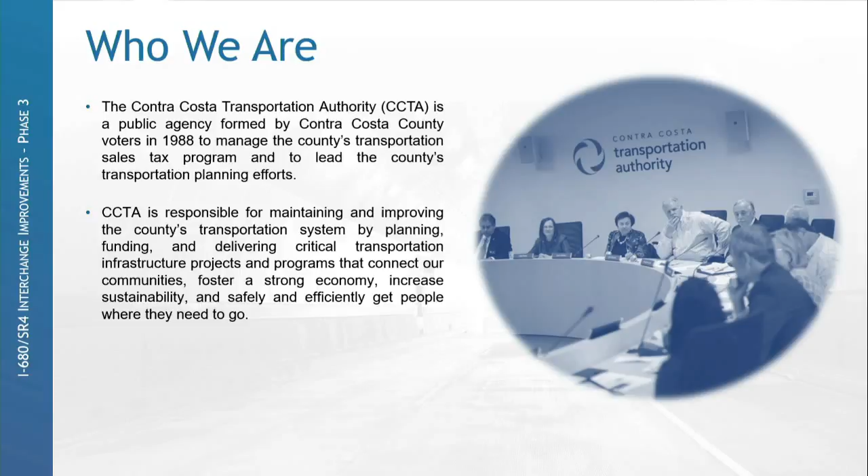This particular project benefited enormously from SB 1. That's the tax measure that passed recently, where there was additional sales tax on gas. So we are very happy that that particular funding was available for this project, and we were able to bring it out to construction because it's been on our books for a long, long time looking for funding.

So we have an 11-member board that governs us, and primarily you won't have to deal with them, but that's how we operate. What do we do?

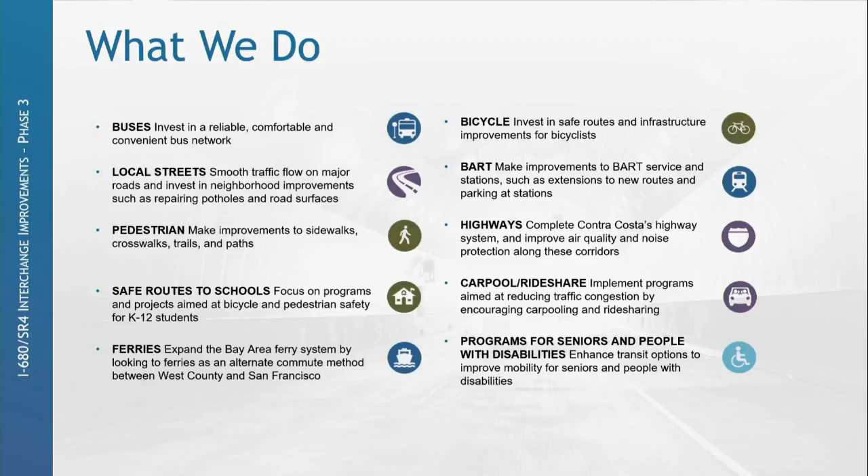We do all kinds of transportation programs. We also do carpool and rideshare. We also help fund other projects like BART, County Connection. We contribute to a lot of those programs. And of course, we do deliver highway transportation projects. We only build them, and then we turn them over to Caltrans, becomes part of the state highway system.

So a little bit about our roles and who actually runs the construction program. We have our executive director, Randy Iwasaki. Many of you might know him. He is the former director of Caltrans. He was hired about 10 years ago to run CCTA, and then he implemented the construction program here.

Joe Reyes has a great experience. He and I worked together at the Carquinez project. He was stationed in Japan for like 2 years delivering the steel segments. So he has a lot of experience working for Caltrans and Caltrans projects. And then the designer, Ben, he's not here right now, but he is with WMH. So that's the core team on our end.

So a few things to know about our projects and how we operate. You know, obviously you have to comply with prevailing wages, and you will be registered with the Department of Industrial Relations in order to submit a bid, both primes and subs.

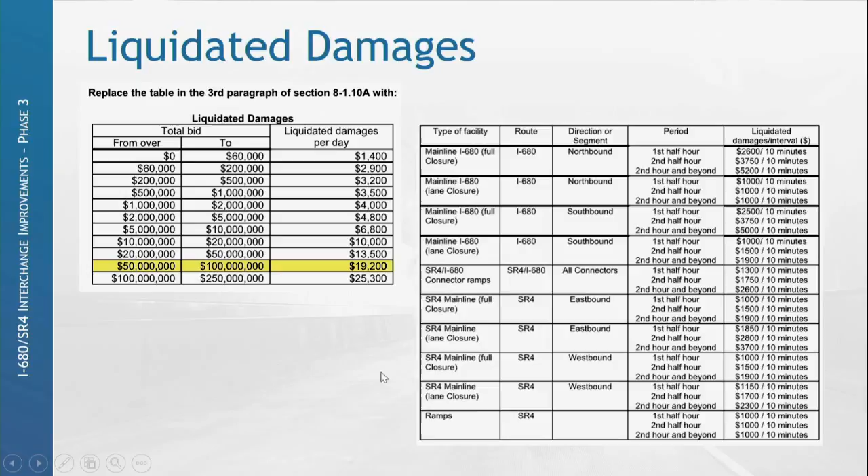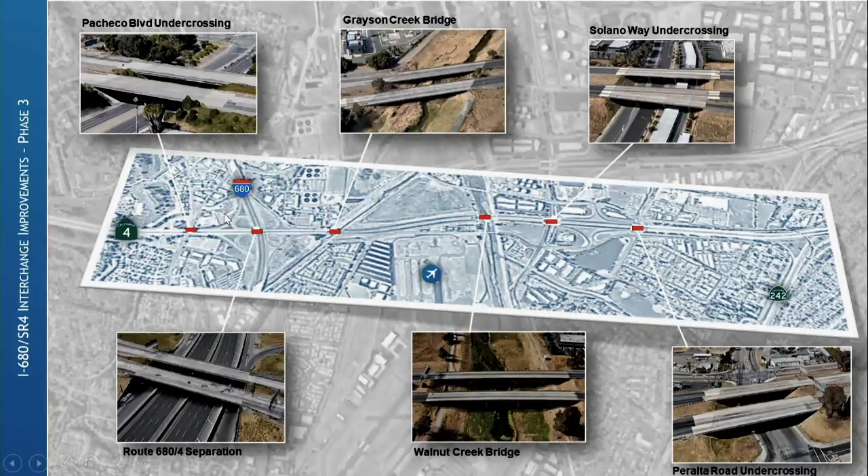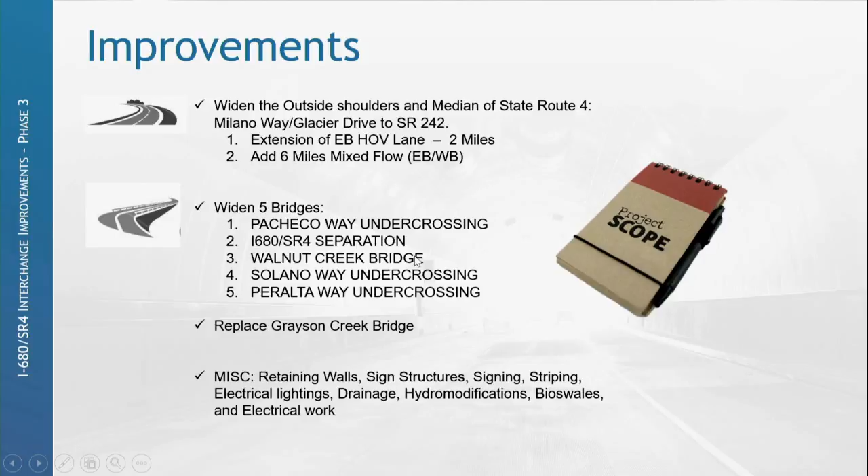The improvements we're going to be doing start at Milano Way/Glacier Drive all the way down to 242, which is essentially an HOV widening and adds about 6 miles of mixed flow eastbound and westbound. I talked about the bridges that are going to be widened or replaced at Grayson Creek. And of course, there's a lot of miscellaneous retaining walls, sign structures and such that you'd expect on a big project along this highway.

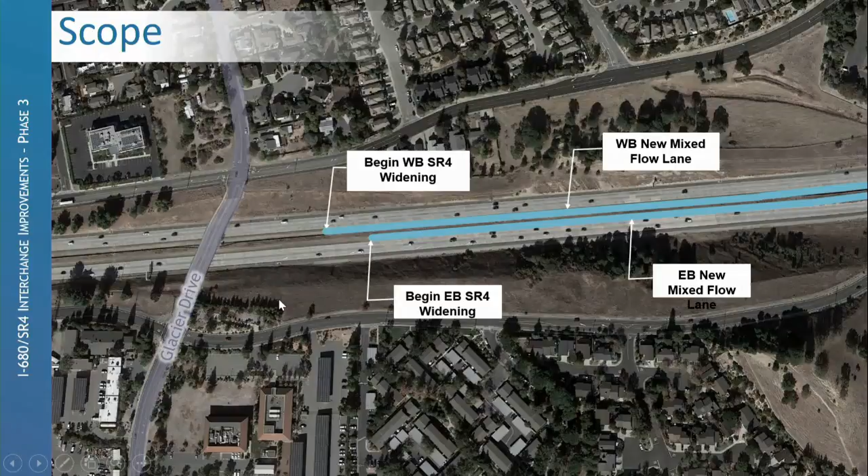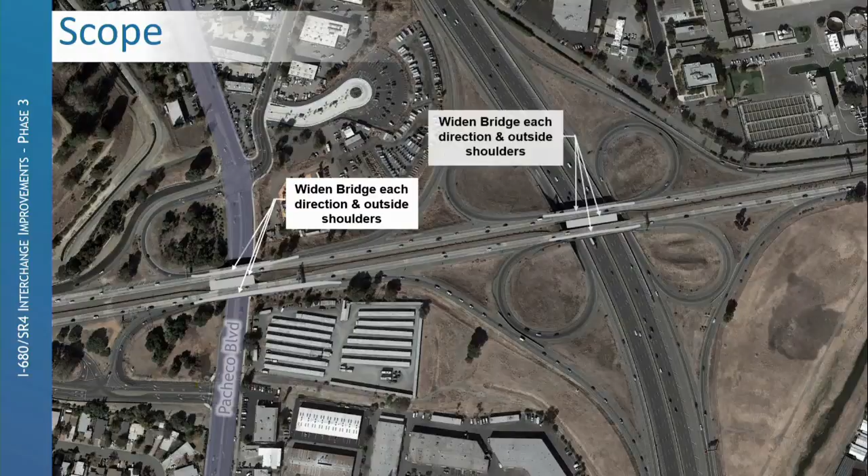So here's an overview of where we're starting. The county offices are right around this exit here, Glacier Drive off Highway 4. There's the median widening and the mixed flow lanes on the westbound and eastbound. As we move further to the interchange, we're obviously going to widen the Pacheco Boulevard Bridge as well as make improvements on the interchange.

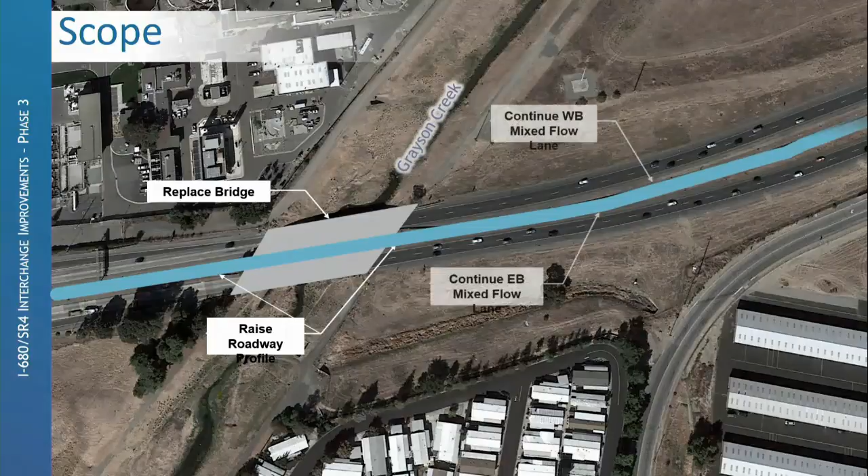Moving further, we get to Grayson Creek. This is the one that's going to get fully replaced in 2 stages. We have to deal with Grayson Creek work windows as always.

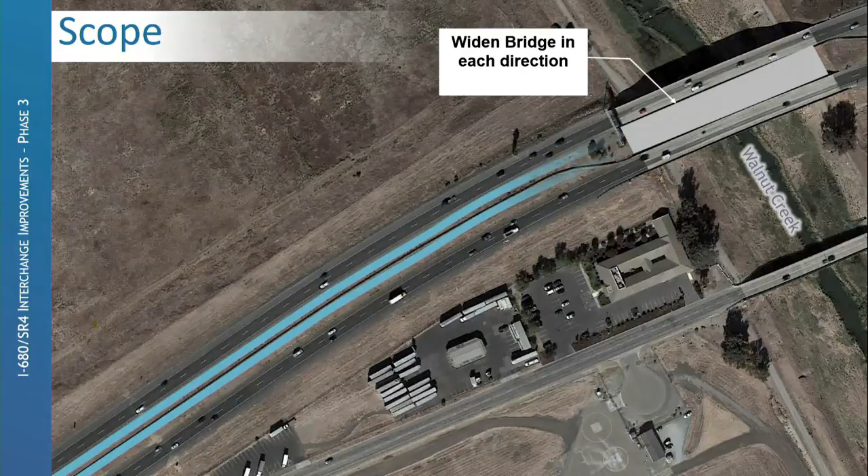And likewise, we also have Walnut Creek. This one, I believe, is going to be only a median widening, so it can probably be done in one stage.

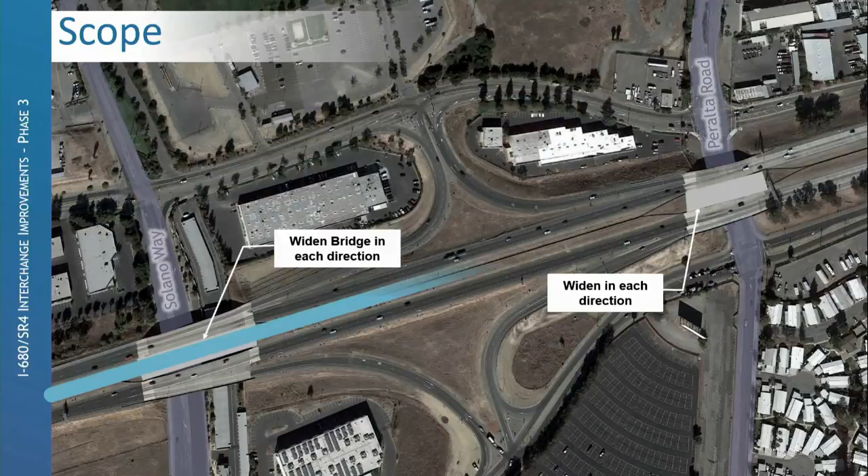As we move further west towards the end of the project, we have Solano Way, Undercrossing, and Peralta, all of which have roads underneath them. But specifically, Solano Way is one that we need to pay attention to because there is an extra space storage underneath the structure that needs to be coordinated, and access with regards to working with that owner is very, very limited.

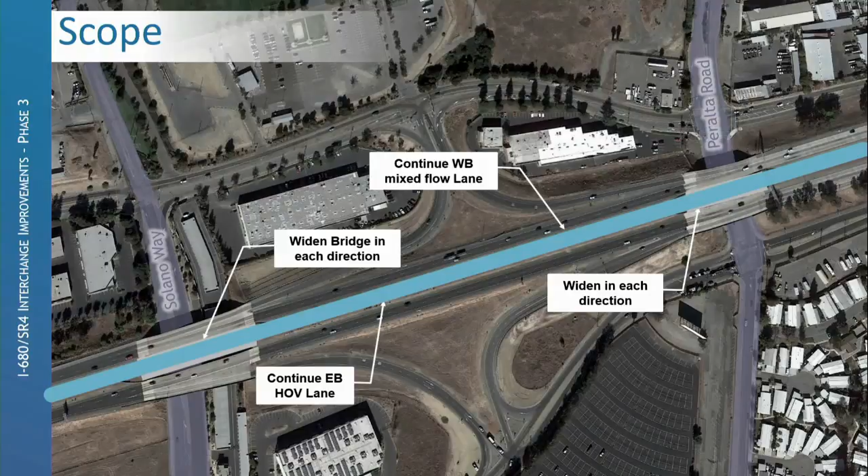So that's all stipulated in the special provisions. Please pay attention to that to make sure that you attack it accurately.

And then lastly, the project ends towards near 242, and eventually, when it's all said and done, this is a primary HOV lane that's going to get used and connect the east and west side of Highway 4.

So this project has been a long time coming, and it took a long time to get here, and there's pressure for us to get it started. I know there's already discussions of whether this job is going to get postponed or delayed, or moved out on bid opening. At this point, we have to stick to our schedules.

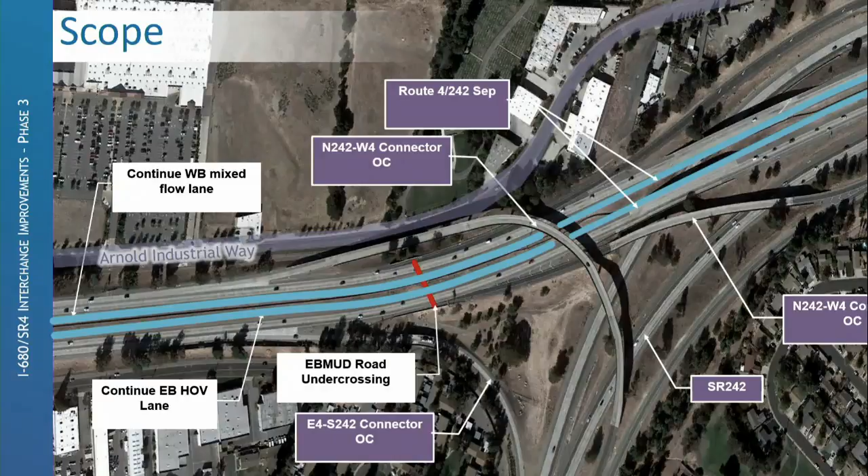So that's the answer that we're hearing from CCTA. So that's the way we're going to proceed forward as of right now. A little bit more, same thing, just ending it. A little bit more of the closer look.

This job has both cut and fill, so I don't see any import on this job, so it's mainly roadway X and balancing. Some of our typical cuts, obviously as shown right there, starting at the beginning of the job. I don't know if you can see some of the quantities I wanted to highlight there, just to give you a magnitude and perspective of how much AC we're putting down.

We got about 29,000 tons there of type A asphalt, and then another 8,000 tons. So not super great quantities, but enough to make sure that we pay attention to those.

Of course, we have our JPC pavement that we got to deal with, and there's a lot of slab replacements out there to be determined. We've attempted to show all those on the plans, but we know those are going to grow potentially, so keep an eye on that.

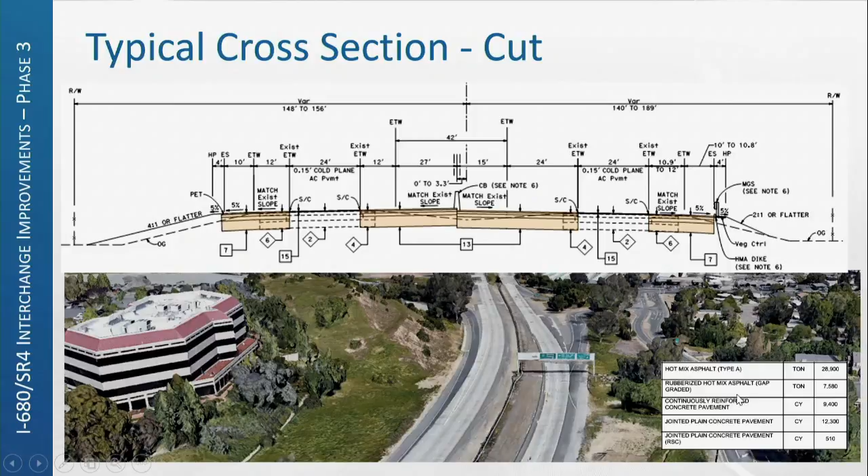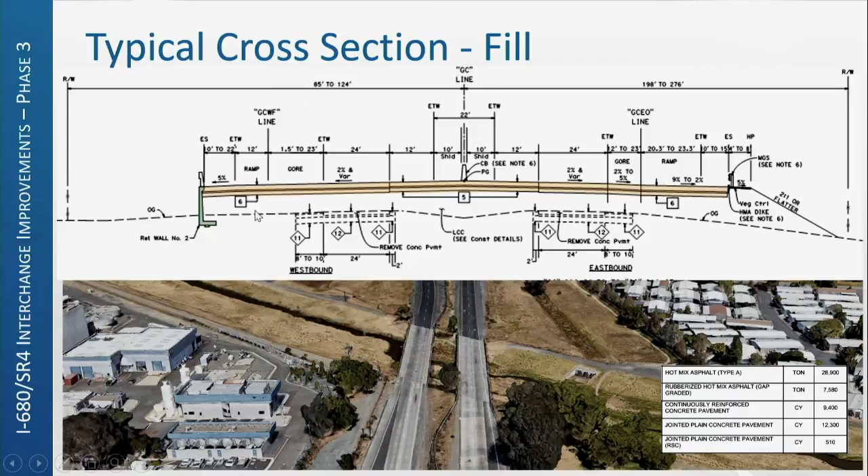And then in some sections, the difference is the other one was not a full median fill. This one is. And of course, when we get to the fill section, there's the existing, and we're actually raising this. This is more towards the Grayson Creek area, where we're actually raising up the structures and approach ramps or approach structures to meet the flood criteria. And within those, there's going to be some retaining walls and such to make sure.

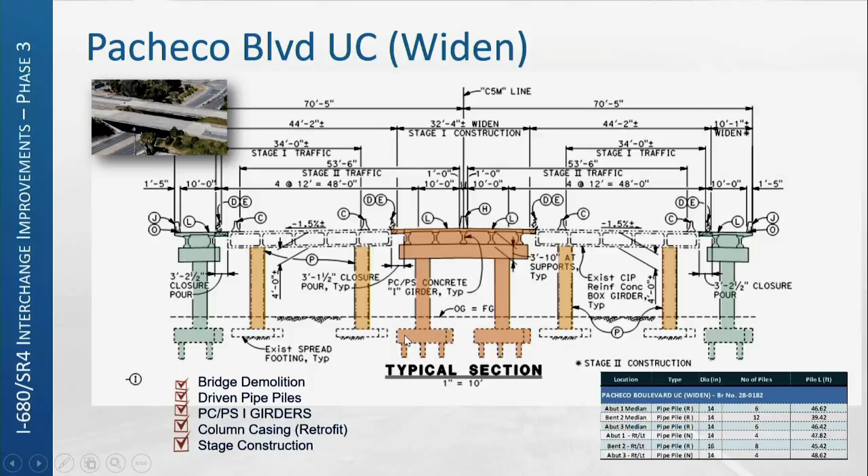Pile driving, I want to highlight, I was talking to Dave earlier, is a key here that we're not allowing any pile driving at night. So it's important to look at every one of these locations as we had during the design phase to make sure that you look at it, because in some areas you may be able to get a regular rig out there, but in some areas you may have to get a special equipment rig to get underneath the bridges.

And then moving these pile rigs at night is probably our solution, because we can't close the local streets in the daytime, let alone some of the freeway closures are going to be very limited.

680 and 4, same thing. We also have driven piles over here, precast girders, two-stage construction, so very similar with column casing retrofit. This is probably the busiest of all the bridges, just because 4 and 680 all meet there.

So depending on how you attack the work, it's just paying attention to the lane closure requirements and what lanes you can do your work in the daytime versus the nighttime.

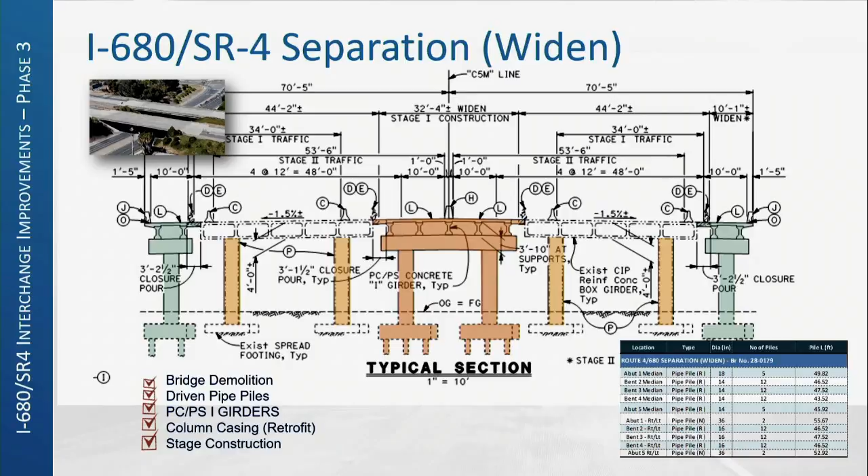Grayson Creek, this one, if we go out to construction this year, we obviously missed the window, so this is going to have to go to the next work window, which is next year. And because it's two-stage, it's probably going to take 2 seasons to get it out. So we're talking about 2-season construction here as well.

Very similar to the other ones: precast girders, stage 1, and then column retrofits, and obviously stage 2, where we widen and put it all together.

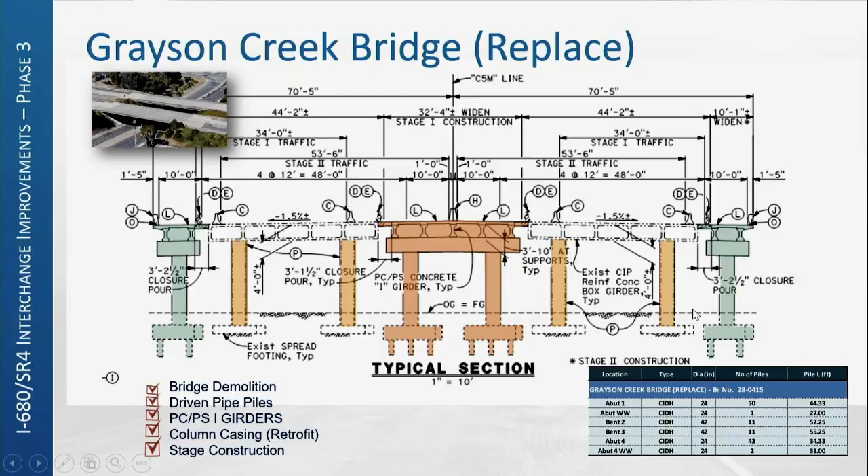Surveys on the contractor, just a note on this. One of the things when we do two-stage construction is we always want to make sure what we built on stage one will still match what we are anticipating on stage two. So all that is spelled out also in the contract. And as we get to Walnut Creek, we can probably attack this next season and get it done in one season if we plan our work aggressively enough.

The only difference now is this one is cast in place box girder, so now we have to deal with false work. And if someone asked me earlier, some of the precast girders are allowed to have metal decking, but some are not. That's more of a Caltrans requirement instead of a CCTA requirement in terms of visual. Only Grayson Creek, I believe, is allowed to have a precast girder with metal decking. The rest that are precast, they want them stripped, formed the old-fashioned way.

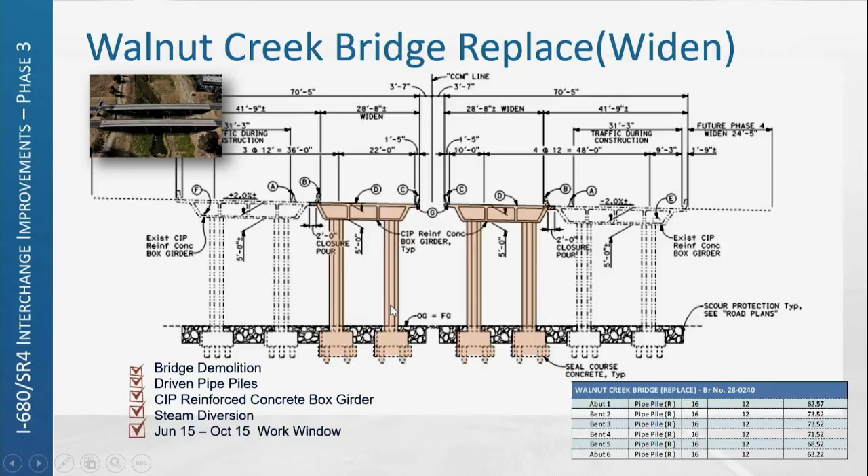These are all driven pipe piles, and we're going to be limited to our June 15th to October 15th work window here as well. Moving on to the local streets, Solano Way, please pay particular attention because we have both driven piles as well as CIDH piles. If you look, there are some big monster piles out there in terms of CIDH. Kinder Morgan utilities are out there, so there are some specific requirements that they have.

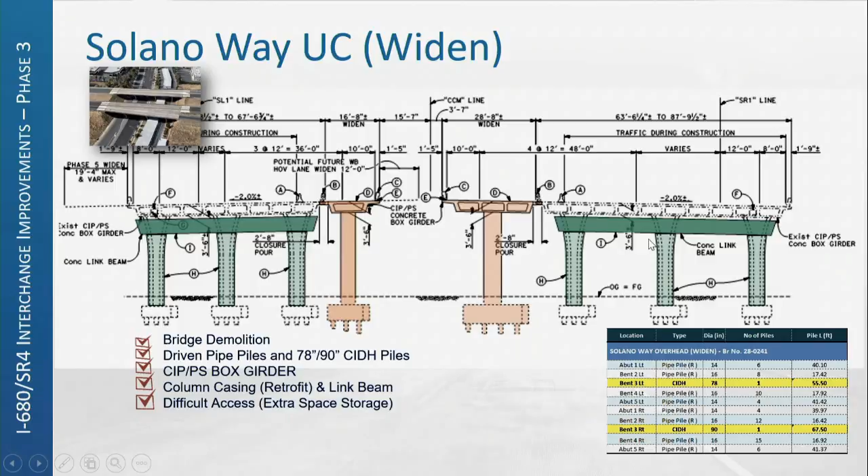More importantly, at Solano Way, the existing business out there, Extra Space Storage, is very concerned about how we're going to build this bridge over them because they have a storage facility directly underneath our bridge, and they are not being accommodating in terms of the number of nights we're allowed there and access. So we put the information in the specs as best we can. Please pay attention to that, but we basically have a cast-in-place pre-stressed box girder there that we're building. At the same time, we're also retrofitting the columns and adding a link beam there. So there's a lot of work to be done on that, and it's on a local street. I want to emphasize the difficult access there.

Lastly, Peralta Road. This one is a simply supported structure, no columns. So the only limitation we have here is being able to work around on the local street in terms of moving our equipment. But if we can do most of it on the top, on the side, then the only issue we would be dealing with in terms of local traffic is getting our false work in there.

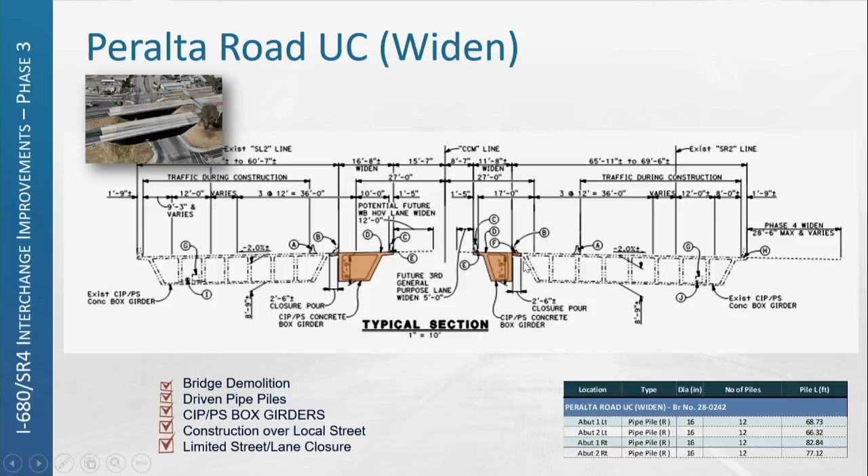Some of the specific features, if you focus on Grayson Creek, which is where this is, because we are elevating the structure there, we are going to have to do it in stage construction. So we have anticipated these temporary retaining walls. We didn't define which one you can use, because you can obviously have multiple designs that are going to be evaluated, but at the end of the day, it's your design. It's up to you what you want to use.

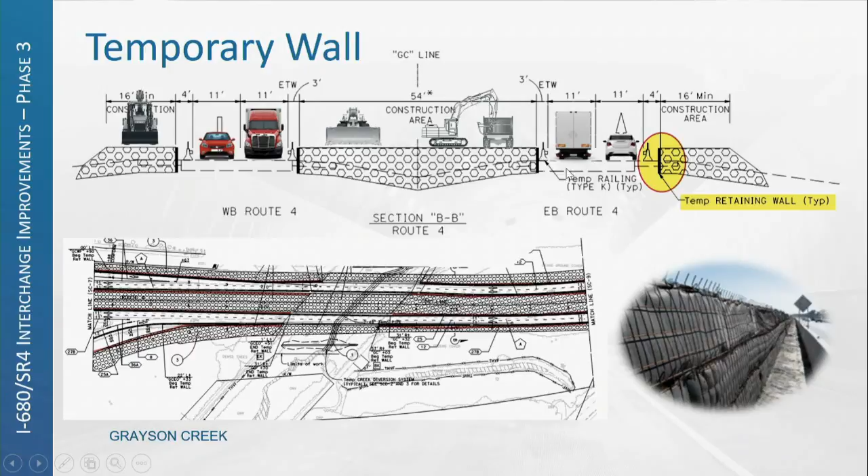In this particular area, there's a lot of things going on. We have aerially deposited lead, as well as the fill has to be lightweight embankment. So all that needs to be considered in how we're going to design this temporary wall, and more importantly, execute it and get this thing in place while we're dealing with traffic. So, temporary wall, I want to highlight that and make sure you're aware of it.

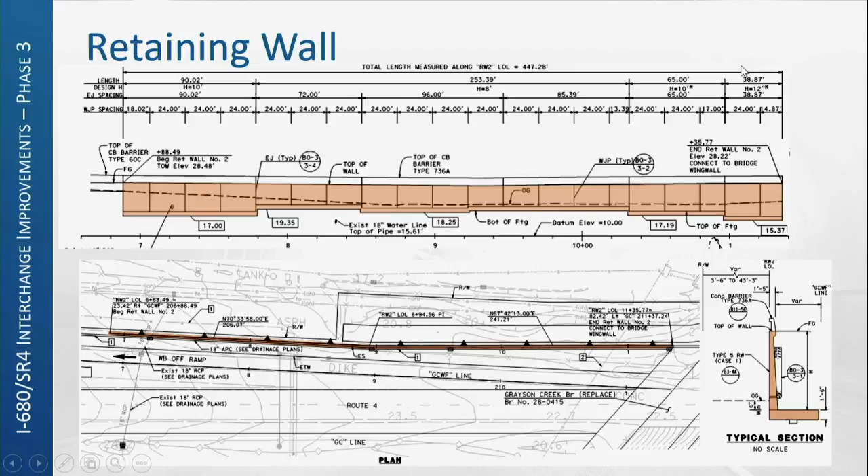And of course, we have a few retaining walls. I just wanted to show this is probably one of the longest retaining walls along I-680 and 4. It's only 450 feet long. I keep looking over there, I have it here too. Anyway, that's the one we probably just want to highlight. There are 2 walls out here, and this is the longest one.

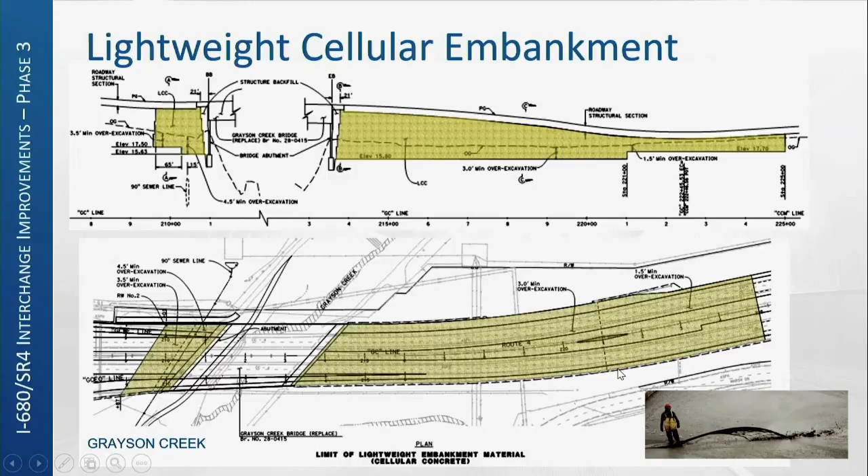So here's the lightweight cellular embankment. Again, if you saw my other picture, I had stage construction shown on there with the temporary retaining walls. This has to be incorporated with that same drawing that we anticipate, and then stage it out somehow. And lightweight cellular embankment, it's like pouring water out there almost, so you have to kind of pour it in certain lifts and factor your design on your retaining wall as well, and encapsulate it.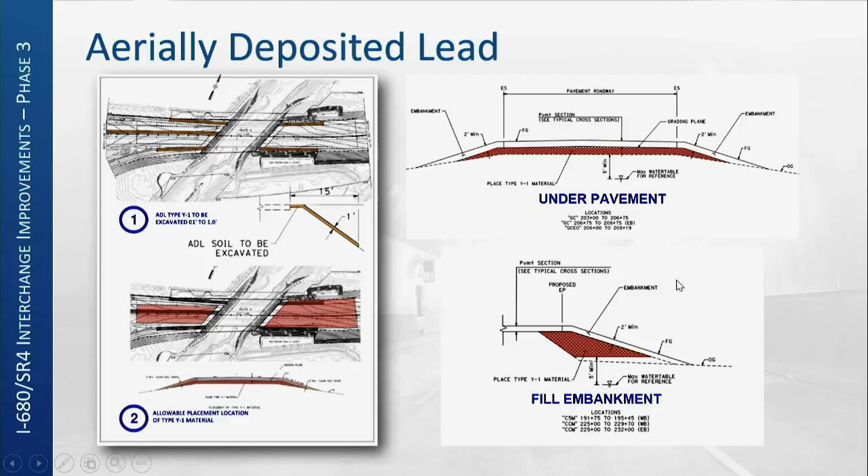And lastly, in the same area, we have aerially deposited lead, and we are allowed to encapsulate that in the existing roadway. So if we can combine our stage construction along with our lightweight embankment fill, it's all in one area. I wanted to make sure everyone was aware of that, because I think that's where a lot of the one-on-top-of-each-other discussion is going to happen between the subs or the primes.

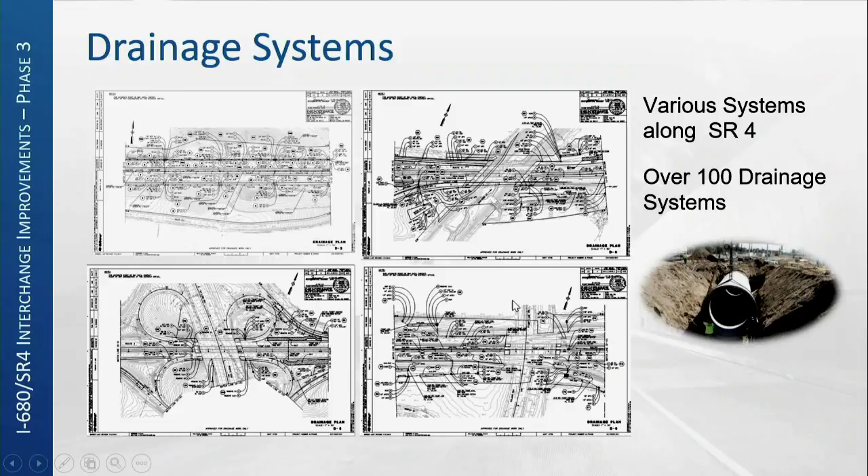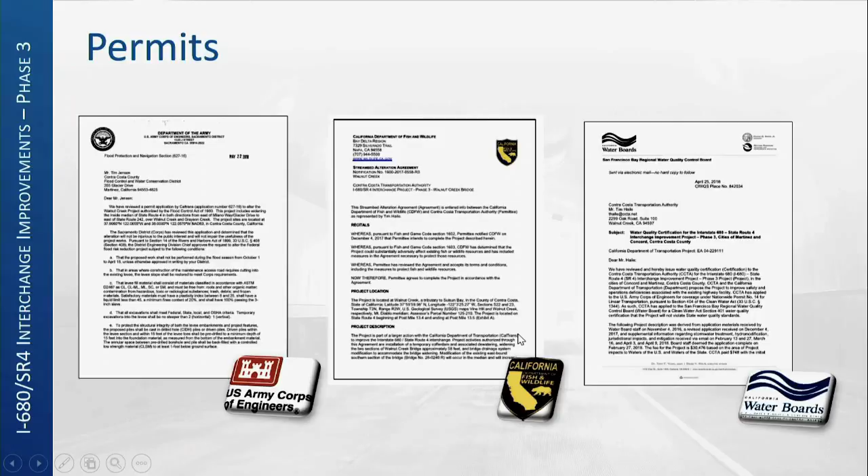Because we are working with Grayson Creek and Walnut Creek, there's specific permit requirements, as you would know, every time we work around water. I wanted to highlight a few of these that are out here and be familiar with them. They are part of your package for informational purposes. I think there's like 800 informational sheets out there. Those are available for you to peruse through, because it leads to getting the work done on the 2 creeks that we have, Walnut and Grayson Creek.

Again, we have June 15th through October 15th. We obviously missed our first window this year, but we got season 1 and 2 next year, and those have to happen. I think the critical path will probably go through Grayson Creek, just because it's 2-stage and it has the most work, almost building 2 bridges, with only 2 seasons to get it done.

We will have a biologist on board to monitor pre-construction, ongoing construction, and after construction to make sure we're in compliance with the permits. Just so you guys know that.

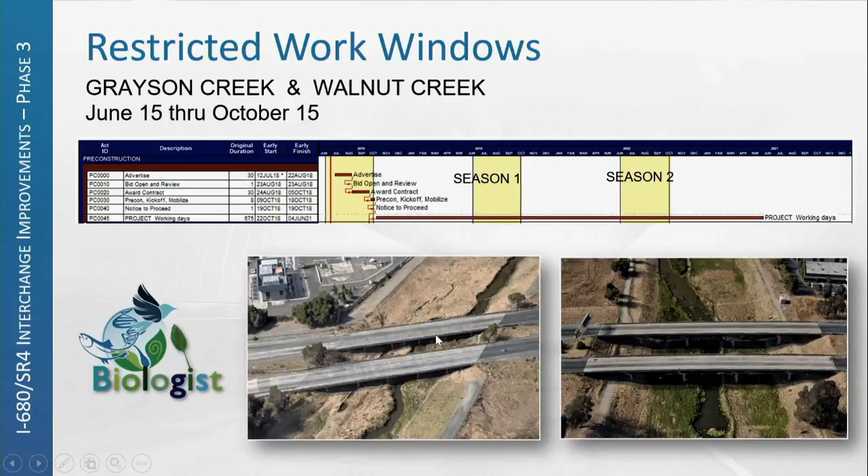Within that temporary creek, in our plans, we've anticipated that you'll probably need these diversion dams or temporary creek diversion. The only caveat is they cannot stay in place past October 15th. So if you have work that needs to be done past October 15th that requires you to be out there, they must be pulled out. So, as an example, with Grayson Creek, you're going to have to put that creek diversion dam in twice, if you're going to come back the following year.

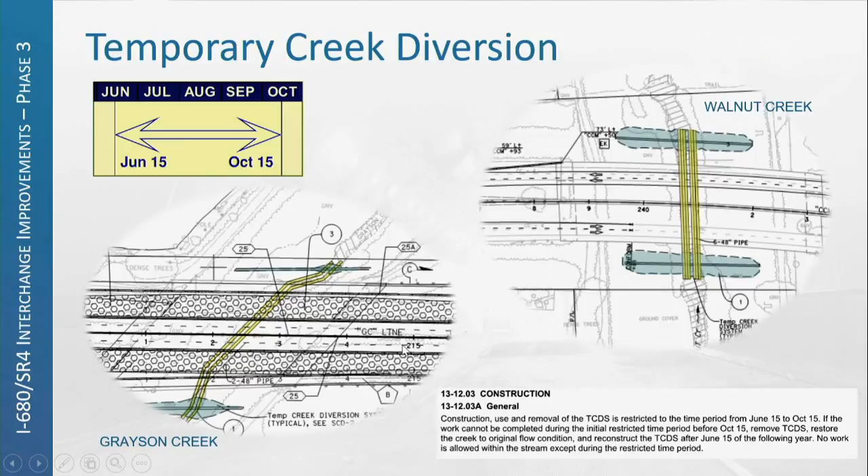Bridge removal - one thing I want to highlight, we're going to allow bridge removal only between 9 p.m. and 5 a.m., Monday through Saturday, as it currently shows on the specs right now. These are the bridges to be removed. It's almost like an exception to the noise restriction requirements, because that's a sensitive topic to CCTA. Pile driving used to be allowed here, but it was removed due to issues we faced with other projects.

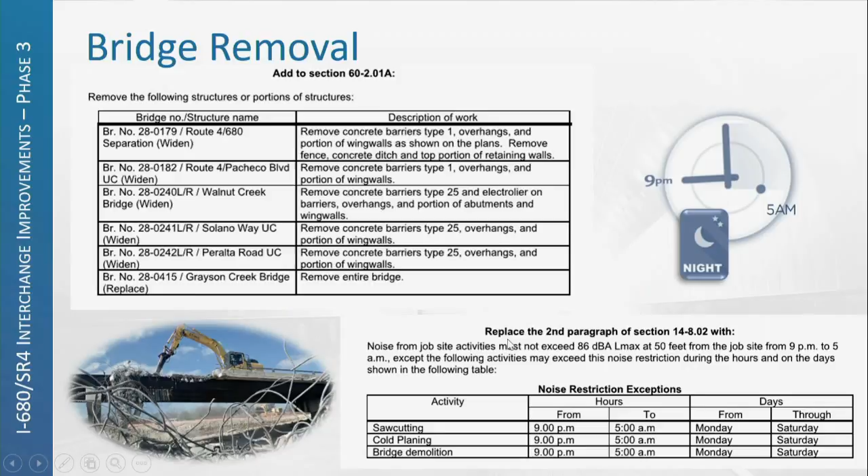So bridge demolition is going to fall in the night, between 9 p.m. and 5 a.m., although we're only removing a sliver of it on the roadway widening area. But Grayson Creek is a full bridge demolition, so that's where most of the noise is going to come from. If we can stay within the 9 to 5 window, I think we should be okay on those. We're ready for the complaints to come in, but that's the best we can do for bridge demolition, because we can't do it in the daytime.

Driven piles - I've highlighted the 680 separation here because this one appears to be the most congested, between driving piles in the median and the exit ramps over here. There are 1, 2, 3 locations where you may have to use these low overhead drill rig equipment. In my little animation drawing, I've shown in gray where the bridges are on top, and then the footings below, where the median ones are going to be getting close to the bridge, depending on how much we remove from it.

So we've addressed those in the contract, and hopefully it's clear that this one is not your normal rig. More importantly, when you set up your equipment, there's a lot of ground anchors that hold this temporary retaining wall for the abutments. So we're going to have to face those when we put our piles on the abutments. There are ground anchors that need to be verified so we miss them before we do any pile driving.

So again, special equipment, and because of the height limitations, and these are driven pipe piles, you might have to do some field splicing in the field on the job site.

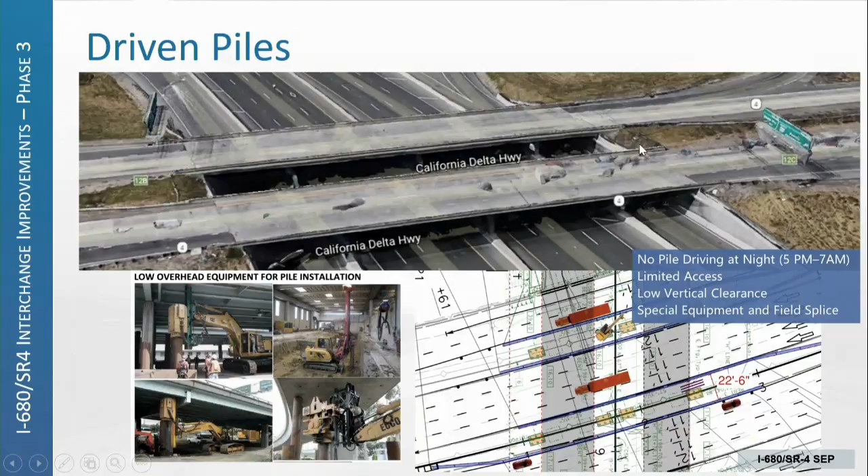In terms of movement, I want to highlight that too. You may not be able to move this crane or rig you have out there in the daytime, so it's stuck there doing pile driving in the daytime, but then we have closures allowed in the nighttime where you can have delivery of materials and movement of your equipment. So that's how we anticipated the contract. You do driving in the daytime, and then you move equipment and bring in material at nighttime.

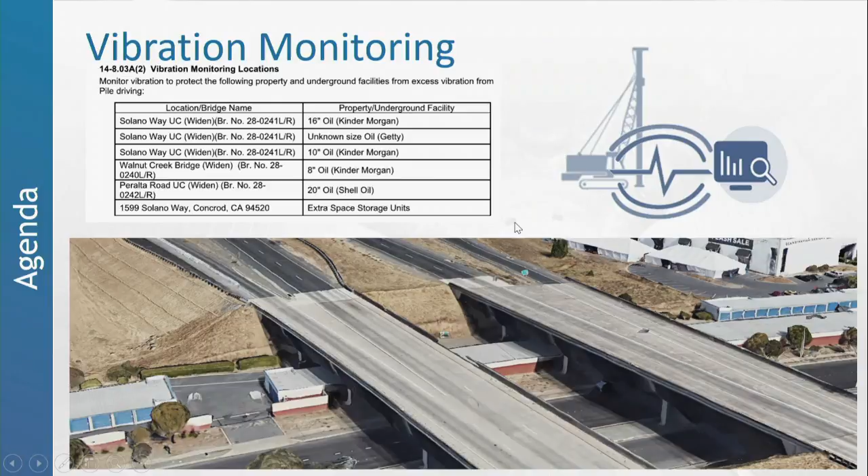Because of the sensitivity of a lot of the structures, more importantly extra space storage, we have required vibration monitoring. If you look at this photo, there's extra space storage directly underneath where we're going to be building a bridge on the inside and on the outside. So there's extra space storage, not only for vibration monitoring, but then we also have Kinder Morgan and Shell oil lines, Phillips 66, that need to be monitored to make sure we don't damage anything. That's kind of where we stand with those. Outside of them being on the job site watching us do the work, we have to do some vibration monitoring to show them that we're not doing any severe issues, damage, or any concerns for their facilities.

Lane closures. I think there's 28 total lane closure charts on this, so if you're trying to do one work in one location, you may have to use 4 or 5 lane charts just to get your closure through Caltrans. So I've highlighted all of them. That includes lane closures, freeway closures, street closures, local street lane closures. So we just need to look at those closely to make sure that we're implementing the correct one.

Someone had asked, can we put false work out there on Solano using the lane closure chart M1 or M4? The answer is yes, only for pile driving. So pay attention to some of those lane closure charts and make sure you're using them correctly. There's just a lot of them.

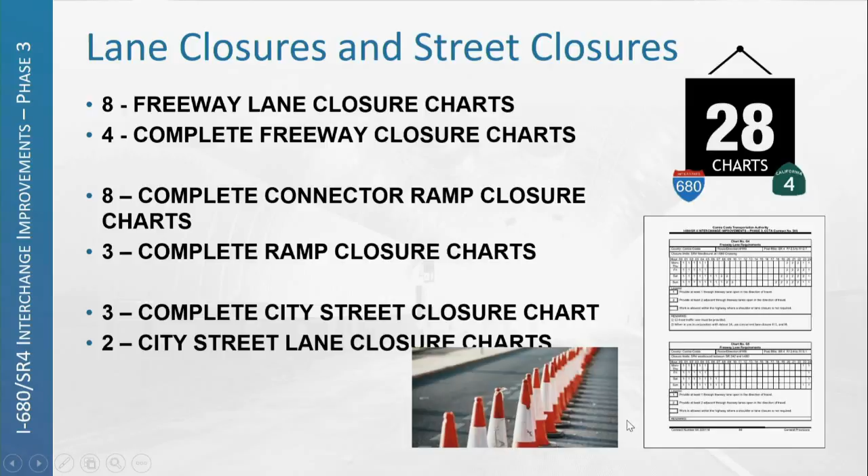And with that, Caltrans and COZEEP will be very involved, and then we've defined a complete freeway closure is allowed, but it can only be for certain things. So you can't just close the freeway just because you want to close the freeway. It's only for specific items. So that's also outlined in the contract.

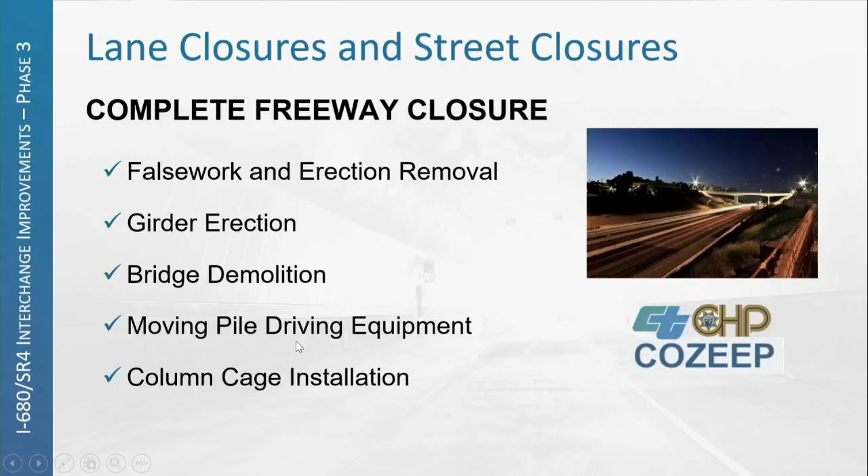As far as detours, we're going to have many of them because we're going to be erecting false work on the freeway or false work on local streets. So we do have freeway detours specified. Just take a look at those to make sure that when we plan our work out, they are being implemented in a manner that will provide public safety, the traffic detours are correct, and they're not creating confusion to the work that we're performing, let alone the detours that we're providing.

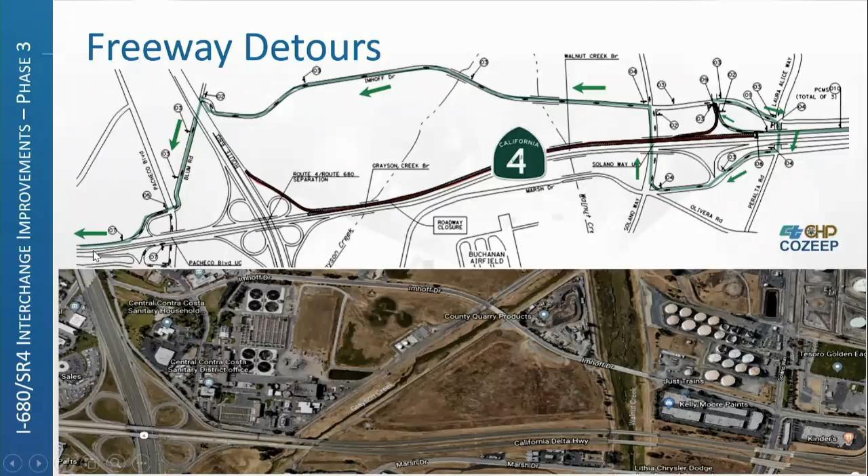If I go backwards on this one, I forgot to mention, on the freeway, we're closing a stretch of the freeway from 680 all the way out to Solano Way. So again, we're taking people off the freeway and making them go through this green route to get back on the freeway. And Caltrans was acceptable to that, so we're just going to have to make that work. So for whatever work we need to do on this stretch, at least for right now, that is allowed.

And last but not least, the famous coordination. There's so many people involved in this project, not only from a construction perspective, but also in-house perspective. So when you put them all together, outside of building the job, everyone has to be happy in one shape or form. So I just wanted to highlight that this job is no different, because at the end of the day, we got to get the job done.

So CCTA has been very proactive in getting a lot of utility work relocated outside of what we're trying to do. Currently right now, we have a contractor out there working for Kinder Morgan and Phillips 66, where this existing oil line that's owned by Phillips 66 and Kinder Morgan that goes right through the Grayson Creek Bridge is being relocated now and going down here in this new location.

So we're out there watching it, as-builting it, to make sure nothing is abandoned or left in place on our new footings. Make sure you rip it out of the way. That way when you guys go out there, to the best that we can, we've done our best to make sure we don't get delayed when we get going.

So that project is slated to complete around September - which one is this one? This one, October. So hopefully by the time we start, they're out of the way.

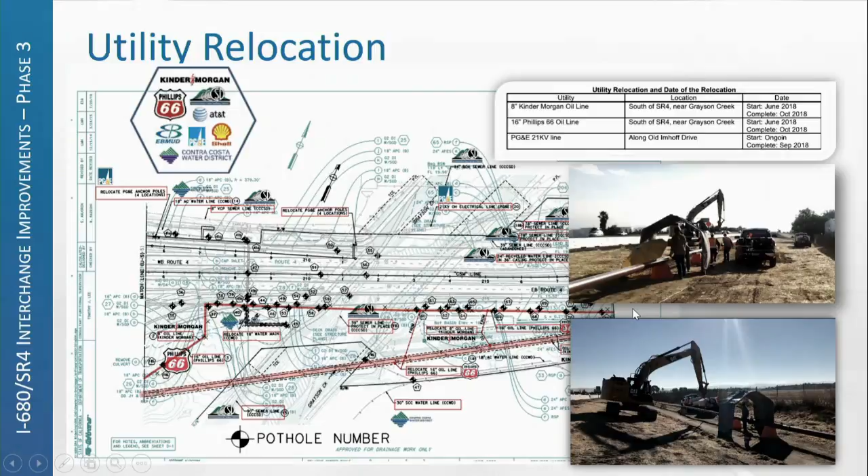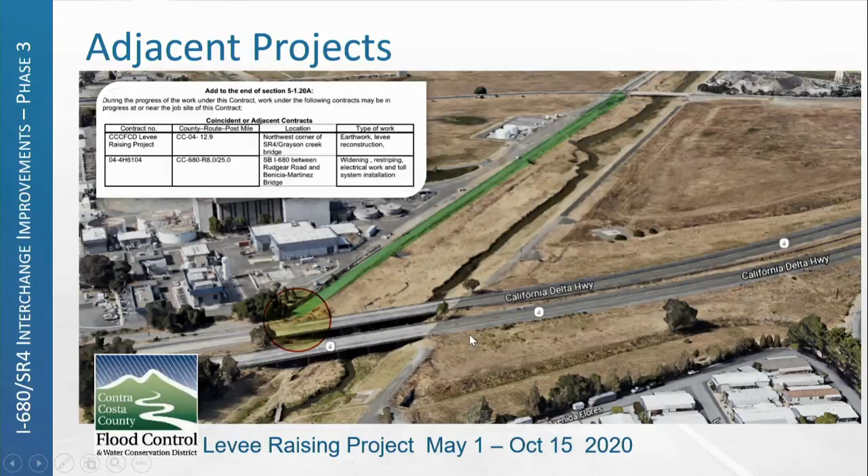Okay, and also adjacent projects - this is going to affect Grayson Creek coordination. There's a levee raising project highlighted here in green coming up, but it's not till 2020 from what I understand. So by then we should be complete with Grayson Creek Stage 1, but we still will be there for Stage 2. So all they want to make sure is they're able to complete their work over here. We're going to have to do some coordination, whether we start here while they're there and vice versa. So until we get there, that's something we just have to keep in mind.

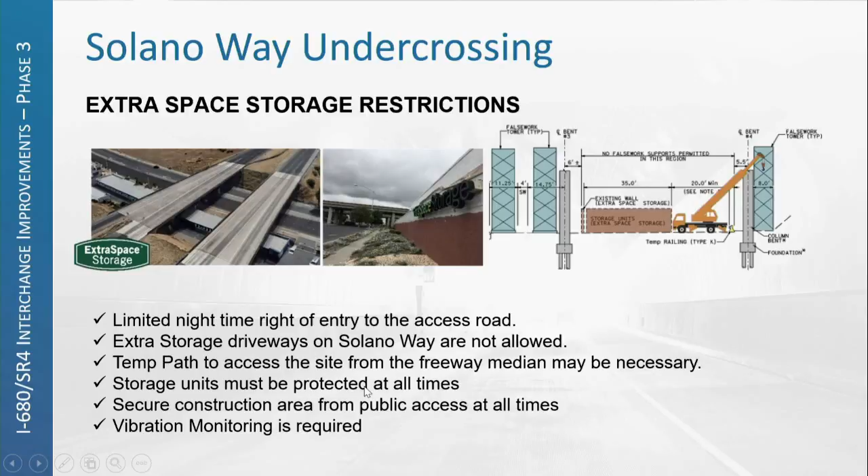The storage units must be protected at all times because they are still being used, and then we secure the area from what we're doing versus what they're doing when we go out and leave the project at nighttime. And of course they want us to implement some vibration monitoring, and all that has to happen while we're trying to build this whole bridge over the top of them.

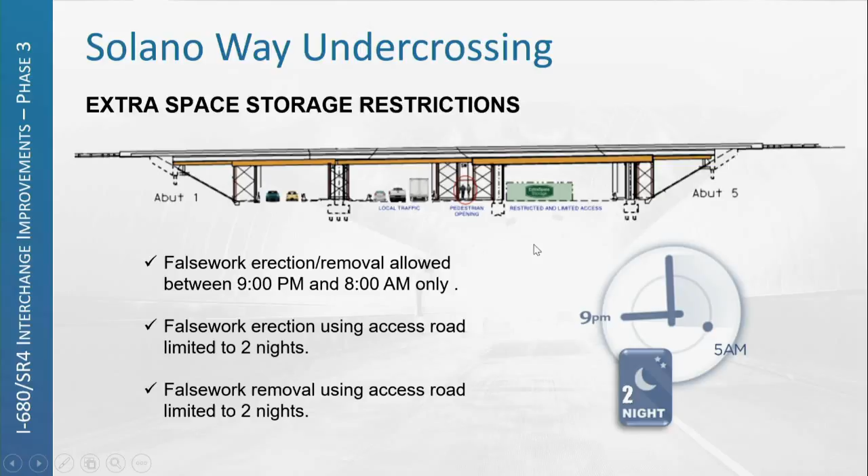So again, false work - I'm talking about this area right here because that's where the building is. To erect all this false work, remove false work, and everything else, they're limiting us. Hey, you can only be here between 9 and 8, you can only do it in a couple nights. So it really has to be pre-planned out, because if you can't do it in 2 nights, they're not going to allow us a 3rd night at this point. So that's what I want to highlight there.

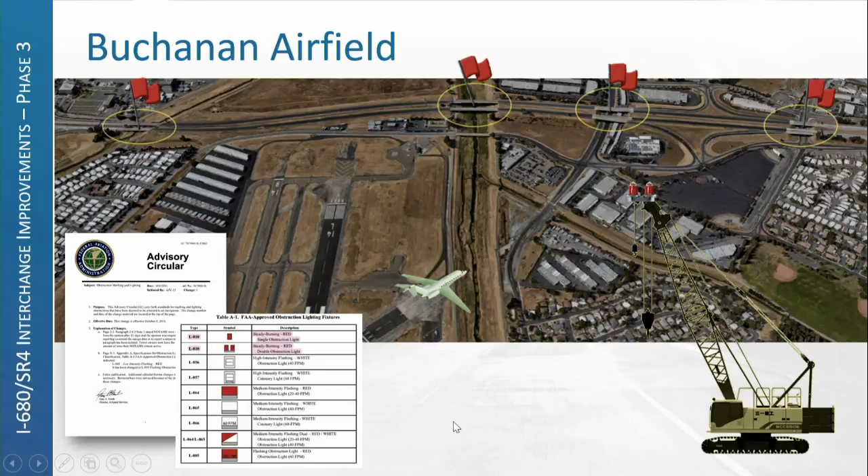And Buchanan Field - sometimes this is easily missed, although there's a big airport out there. So the 4 structures near the airport, crane is what they're concerned about, depending on what crane you're using. There's an advisory circular from FAA that requires height restrictions and light requirements. They're referenced in our contract - if you can see all our runways going this way and landing maybe going this way, maybe that's not an issue, but these 3 particular ones, depending on what equipment you're using, we have to comply with those and coordinate with them to make sure we're not putting a 200-foot crane out there in the middle of their landing season, whatever that airport references to.

So that is the big picture that I have, guys. Again, this project is on Bid Express, so please check the bidder inquiries regularly, because we try to answer as fast as we can and then issue addendums as quickly as we can. Right now there's probably only 8 to 10 questions in there. The last day to submit is, as I said at the beginning, August 16th. So after that we can't accept any more inquiries. And of course our bid opening is on August 23rd.

It is all slated to start this project on October 19th, and it is a big deal for CCTA to make sure it happens. So with that, I'm going to leave it with you guys. If you have any questions, hopefully we can answer them, and if we can't, we will get back to you. More importantly, please submit them officially through bidder inquiry so we can get those answered officially as well.

So, okay? Question? Ask them. Okay, Ivan, I'll turn it back over to you and we could chat afterwards too. Thanks.